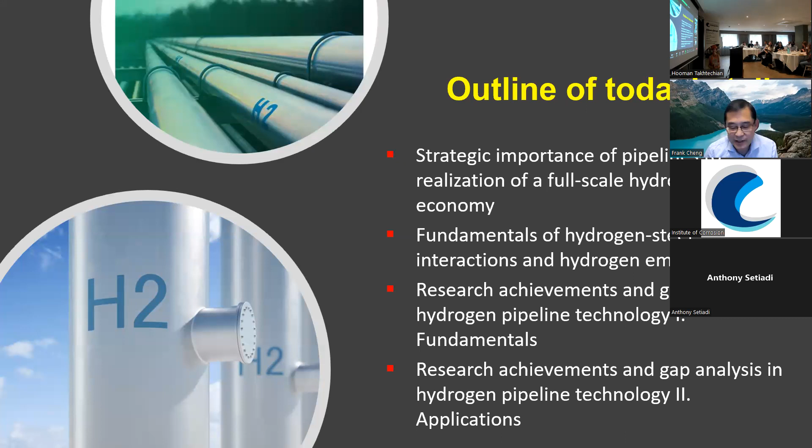According to many, the world is heading for hydrogen. You can find lots of documents reviewing the importance of hydrogen in energy transition and its application in different sectors by 2050. At the same time, different countries and government bodies have issued hydrogen strategy documents. Here are two examples published by the US and Canadian governments. In Canada, the provinces of British Columbia, Alberta, and Saskatchewan have also published hydrogen roadmaps and studies, along with government policies to realize and develop the hydrogen economy in the near future.

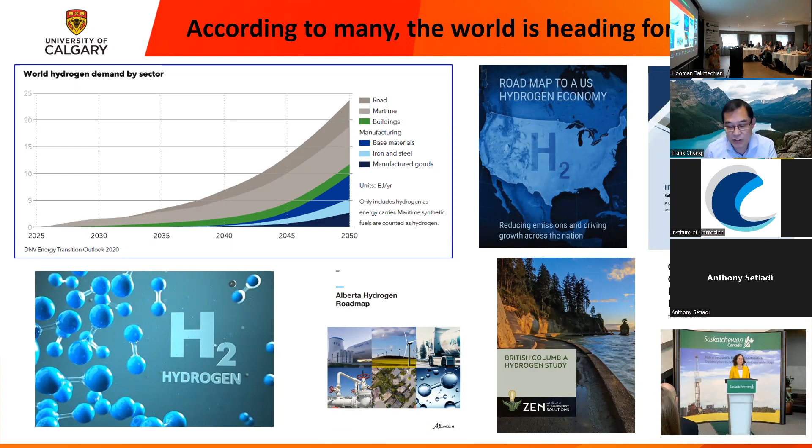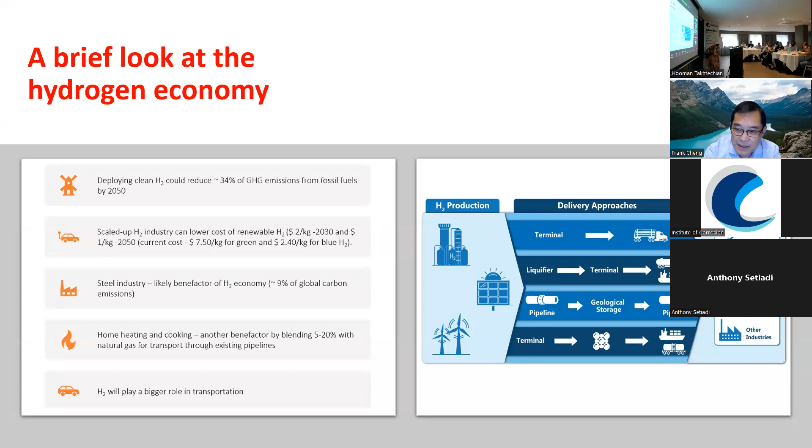The hydrogen economy actually includes 3 interrelated sections. You can see from this slide it includes hydrogen production, hydrogen delivery, and hydrogen use. So efficient, economic, and safe hydrogen transport is pretty important for realization of the hydrogen economy because it's one of the important components of the hydrogen value chain.

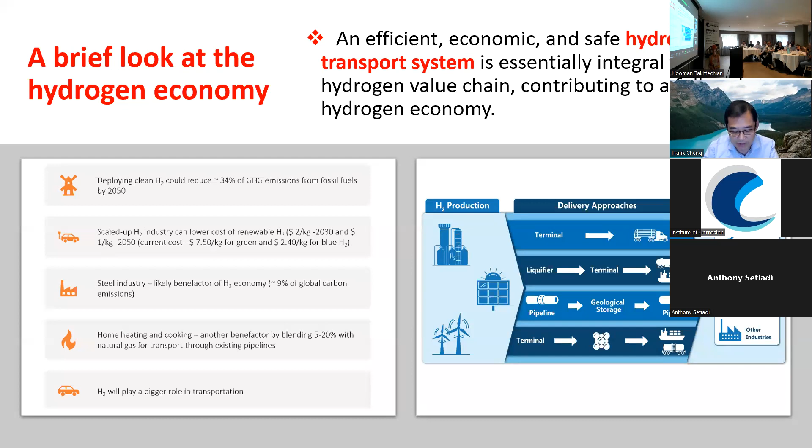Currently we have many different methods to transport hydrogen, either through tank trucks, tube trailers, or pipelines. A very quick comparison from this table shows that when pipelines are compared with tank trucks and tube trailers, pipelines have many advantages in terms of transportation capacity, cost, and efficiency, especially for long distance transmission of hydrogen. That's the reason the US Department of Energy issued a statement: transporting hydrogen through existing pipelines provides a low cost option for delivering large volumes of hydrogen.

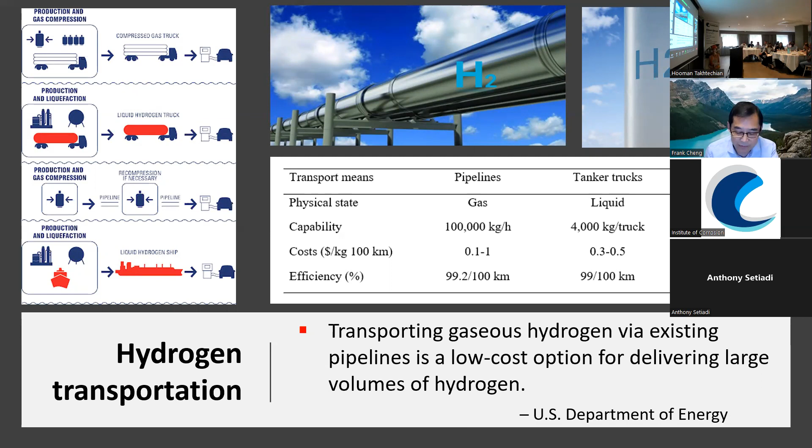There are 2 types of pipelines we usually talk about. One is dedicated pipelines, referring to pure hydrogen transport pipelines, where hydrogen is mainly used in the transport and power sectors. At the same time, another important topic is blending hydrogen with natural gas through existing natural gas pipelines, which is a blended form of hydrogen transport. This blended hydrogen is mostly used in manufacturing and building sectors.

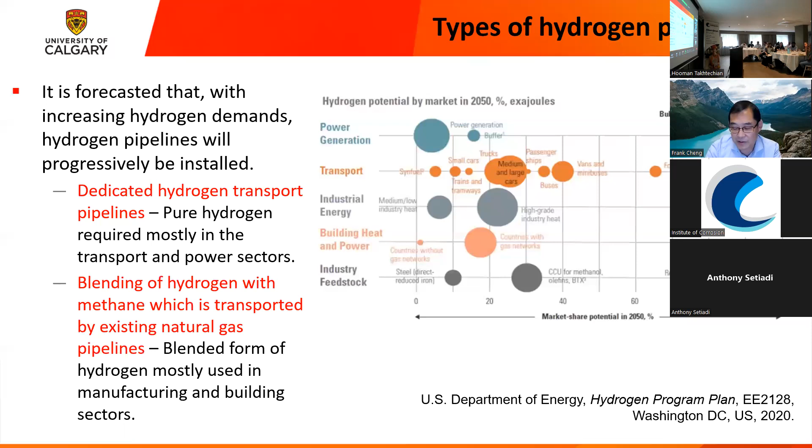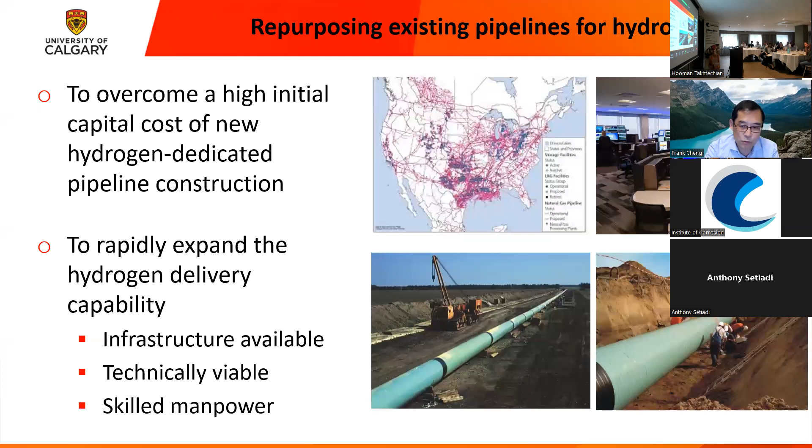We use the existing pipeline for hydrogen service, and there are lots of benefits. Firstly, it can overcome the high initial capital cost of new pipeline construction. At the same time, we have very extensive natural gas pipeline infrastructure. From the North American pipeline network, you can see the gas pipeline network is very extensive, distributed across Canada and the US. We have operated and managed natural gas pipelines over many, many years - we have the experience, the expertise, and the skilled manpower. That makes us, if we overcome certain technical issues, able to use natural gas pipelines to realize the hydrogen economy at an increased speed.

Of course, when we convert existing pipelines to transport hydrogen, we do realize there are technical challenges in at least 4 different aspects. First is pipe material - whether old or corroded pipeline is safe enough to transport high pressure hydrogen. Second is operation, related to hydrogen natural gas blending and some operation issues. Third is integrity, for example leak detection and how to perform inline inspection for hydrogen pipelines. Finally is safety for the users.

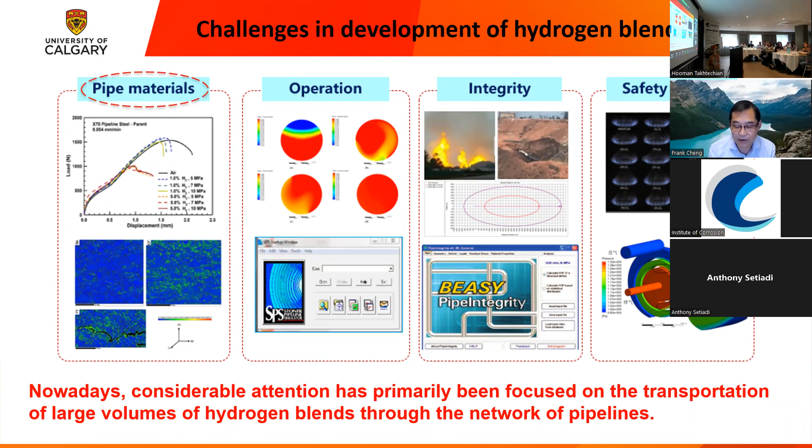If you have a chance to attend relevant events, I believe considerable attention has been focused on the transportation of large volumes of hydrogen through networks of pipelines. That's also consistent with today's topic, and I will focus on the first area of challenge, which is pipe materials.

That's just a quick review of some background. The next part is the fundamentals of hydrogen embrittlement. So what is hydrogen embrittlement? It's a general term that refers to the degradation of metals owing to hydrogen-steel or hydrogen-metal interactions.

So degradation, the key word here, can actually mean many different forms or modes, and I will talk about that a little bit later. But firstly, I want to emphasize a very important concept: hydrogen embrittlement.

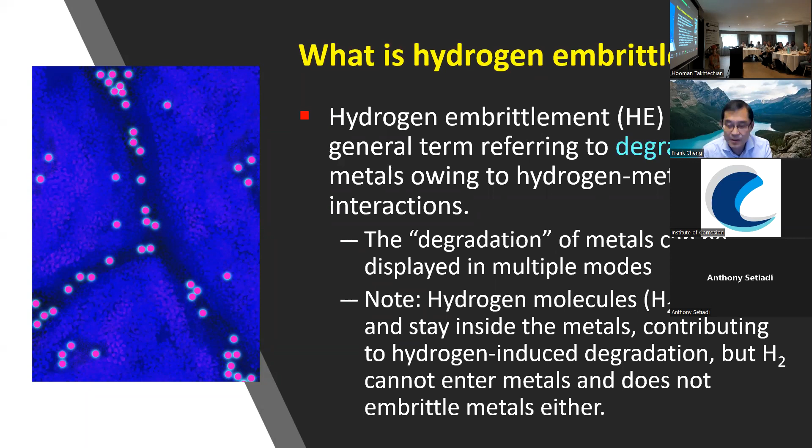So what is the hydrogen here? Hydrogen here means the hydrogen atom, H. The reason is pretty clear: hydrogen molecules, H2, cannot enter the metal or steel directly. However, the H hydrogen atom can stay inside the metal. So when we talk about hydrogen embrittlement, we always refer to hydrogen atoms entering the metal from the environment. That's why we emphasize that it's the hydrogen atom that can make the metal brittle.

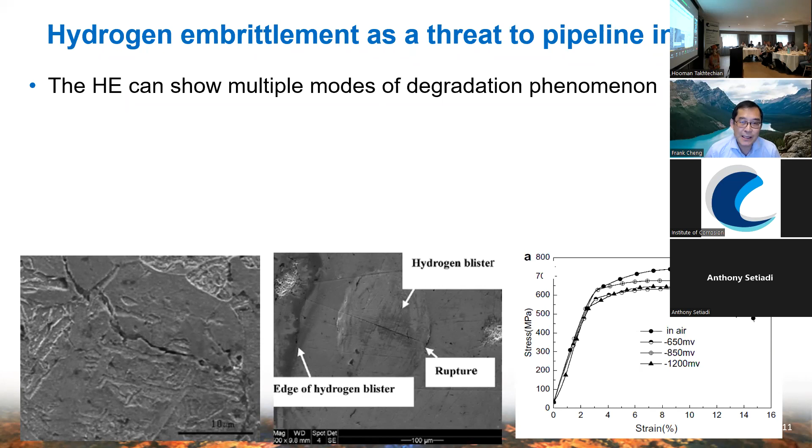Okay, so when hydrogen embrittlement happens, it can show multiple modes of degradation. The most important degradation of metals is hydrogen-induced cracking. When hydrogen goes into the steel, cracks can be formed and initiated by many different mechanisms, which I will talk about a little bit later. This is the most dangerous mode of hydrogen embrittlement.

At the same time, hydrogen can degrade the mechanical properties of metals, such as loss in ductility and reduction in fracture toughness. So they will cause degradation of mechanical infrastructure integrity and can cause the failure of pipelines.

Okay, for hydrogen embrittlement to happen, it usually includes 6 steps. This is the entire process for hydrogen embrittlement to happen.

Firstly, the hydrogen atom must be generated in the environment. After the hydrogen atom is generated, it will adsorb on the external surface of the metal — we call it adsorption. Then the next step is the adsorbed hydrogen from the outside goes into the inside of the metal, from adsorption becoming absorption. So we usually call it ADS hydrogen and ABS hydrogen.

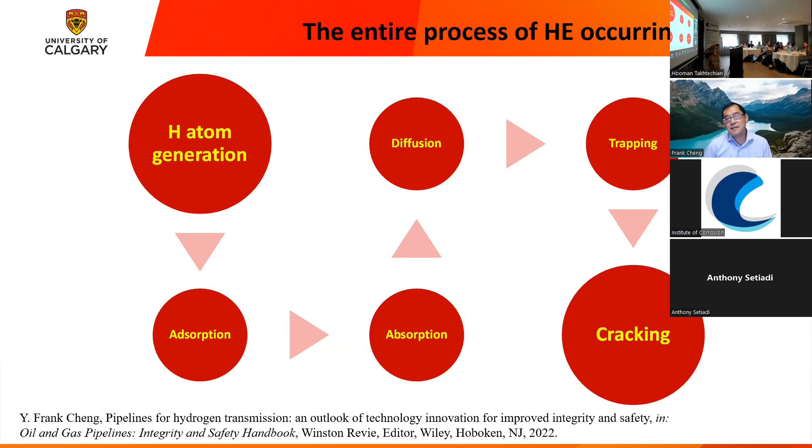If the trapped hydrogen reaches a certain concentration, combined with a certain metallurgical microstructure and mechanical stress, then cracks can be initiated — that's called hydrogen-induced cracking. So basically there are 6 steps included in the entire process.

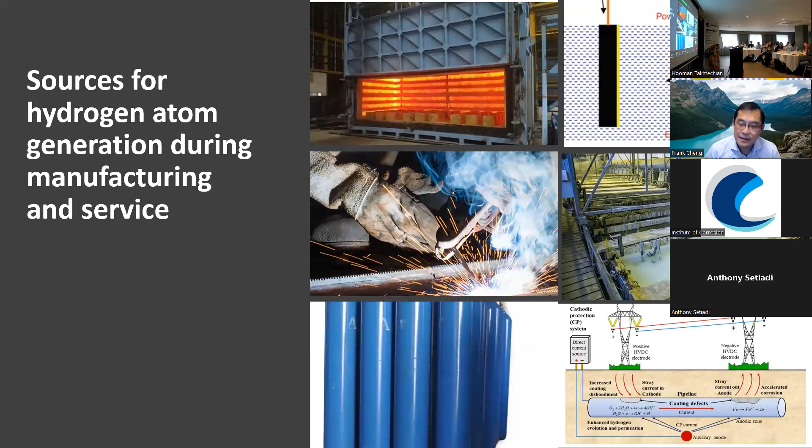Okay, so first let's look at the first step. Hydrogen can be generated in many different environments. You can see from these slides it can be produced in heat treatment, electroplating, welding, surface treatment, high pressure hydrogen gas, and what we call corrosion reaction. Anyhow, no matter the source, please remember we're talking about the hydrogen atom, H.

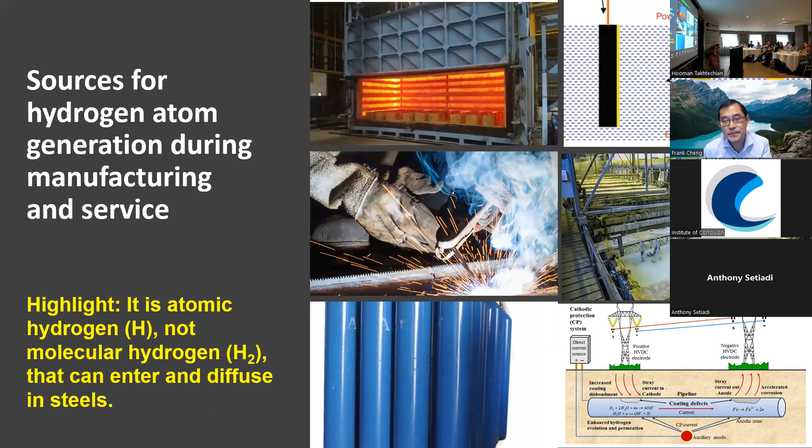For pipelines, hydrogen can be produced from outside the pipeline or inside the pipeline. If we talk about hydrogen produced from outside, since most pipelines are buried structures, this mainly refers to the soil side. For example, corrosion can happen if the coating fails or cathodic protection is not effective.

You can see from these slides that the hydrogen atom can be produced by the hydrogen evolution reaction, an electrochemical reduction of hydrogen ions. The hydrogen atom, HADS, can either combine into hydrogen molecule H2. If the H2 is produced by either chemical recombination or electrochemical recombination, then we don't worry about hydrogen embrittlement, because the hydrogen molecule cannot go into the steel.

However, there is a certain percentage of the HADS that can go into the pipeline steel and become HABS. So this is the main mechanism: hydrogen generation and hydrogen permeation from the corrosion reaction.

And of course, if cathodic protection is not properly controlled — what we usually call cathodic overprotection, or over CP — it can also induce hydrogen atoms. So that's from the soil side.

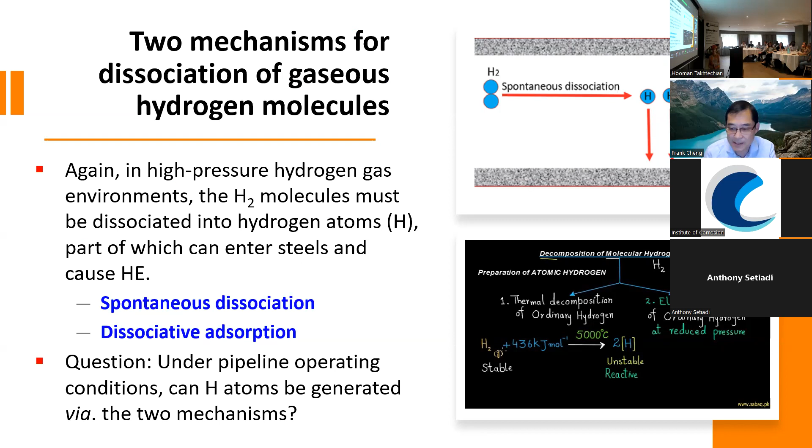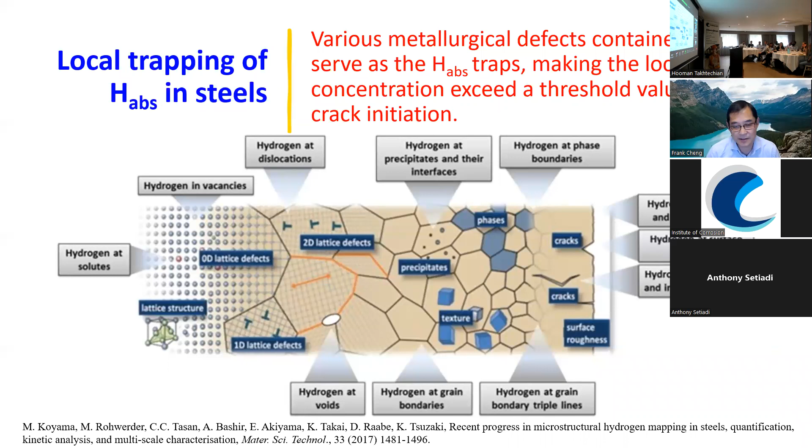If the local hydrogen concentration reaches a certain threshold value, combined with stress and certain steel metallurgy conditions, cracks can be initiated. So why does hydrogen reaching a certain concentration make the crack initiate? If you review the literature, you can find lots of different mechanisms, but two main mechanisms are very popular in hydrogen embrittlement.

We call the first one HEDE, hydrogen enhanced decohesion mechanism. Based on this mechanism, hydrogen atoms can weaken and break the bonding between the Fe and Fe bond.

The second one we call the hydrogen enhanced local plasticity mechanism. According to this mechanism, hydrogen atoms can combine with internal dislocations and decrease the movement energy requirement for dislocation movement. In this way, hydrogen can increase the mobility of dislocation.

So which mechanism applies for a certain system? My answer is it depends. We need to think about the mechanical property of the metal and the steel, and what's the steel metallurgy of the steel. At the same time, it also depends on hydrogen atom concentration.

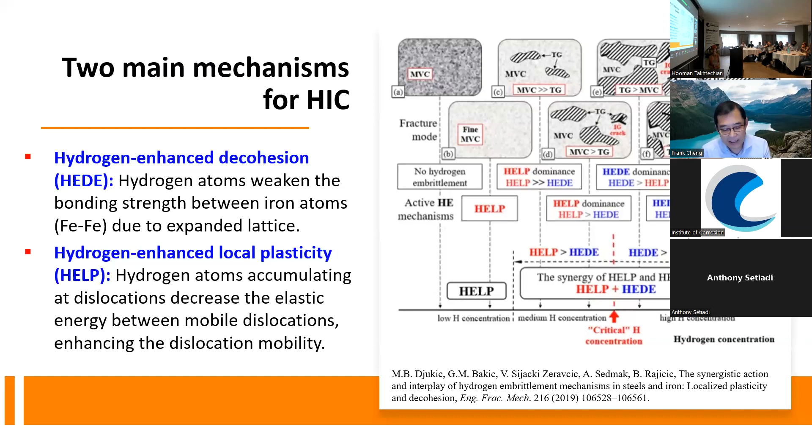Because of limited time, I won't go into much detailed discussion about the mechanism. But basically, to quickly summarize the fundamentals of hydrogen embrittlement in one sentence: for hydrogen embrittlement to happen, it depends on three interrelated conditions - the steel metallurgy, the mechanical stress, and the local hydrogen atom concentration.

When we talk about the hydrogen embrittlement of pipelines, let's go to the current research progress and some of the gaps and analysis of gaps. The first thing: how is hydrogen atom generated in high pressure hydrogen gas environment? As I introduced in the fundamental section, there are two mechanisms.

The first one is spontaneous dissociation of hydrogen molecules. This reaction is simple. On the top left side, based on this mechanism, H2 hydrogen gas decomposes into H, that's a hydrogen atom. When we calculate the free energy change of this reaction, according to different hydrogen pipeline operating conditions, such as temperature and pressure...

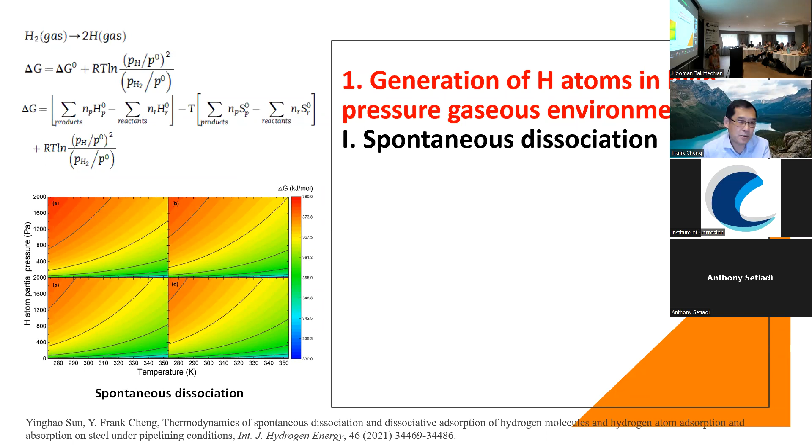You can see across all the conditions, the free energy change of this reaction is positive. We know if the free energy change is positive, that means this reaction is thermodynamically not possible. Based on the thermodynamic analysis, we can have an important conclusion: under pipeline operating conditions, the spontaneous dissociation of hydrogen molecule is not possible. That's why we don't need to worry about hydrogen atom generation by this mechanism, because the thermodynamic calculation tells us the answer is no.

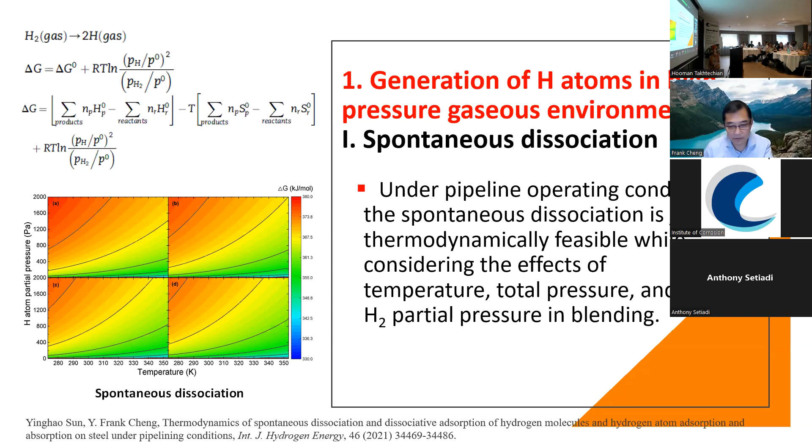How about another mechanism? That's dissociative adsorption. On the left top side, you can see this mechanism, and we can write the reaction: hydrogen gas, H2, adsorbed on the surface of the steel - using crystal plane 100 as an example - this reaction can generate the hydrogen atom H.

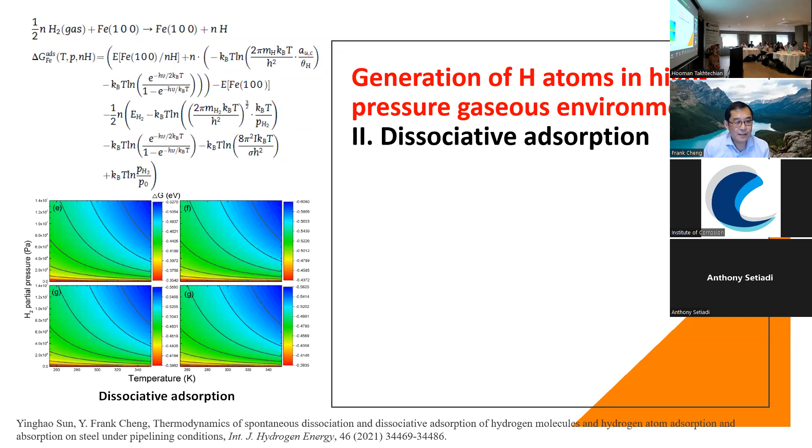We also performed the thermodynamic calculation for this. You can see the results here: across different temperature and operating pressure, the free energy change is actually all negative. This calculation tells us that when we use the pipeline to transport hydrogen gas, hydrogen atoms can potentially be generated based on this mechanism, because the thermodynamic calculation tells us yes. That's why potentially the hydrogen atom can be generated and go into pipeline steel to cause hydrogen embrittlement if we use a pipeline to transport hydrogen.

Okay, so I'll give the main results and the thermodynamic model here, and just share with you. We need to care about this problem. That's the first important thing involved in the hydrogen atom generation.

The second question: when we use the existing natural gas pipeline to transport hydrogen, how will methane, CH4, the main component of natural gas, interact with the hydrogen, H2? Consequently, this will influence the adsorption and dissociation reaction. That's related to the influence of the two major gas components when we use a pipeline to transport the blended form.

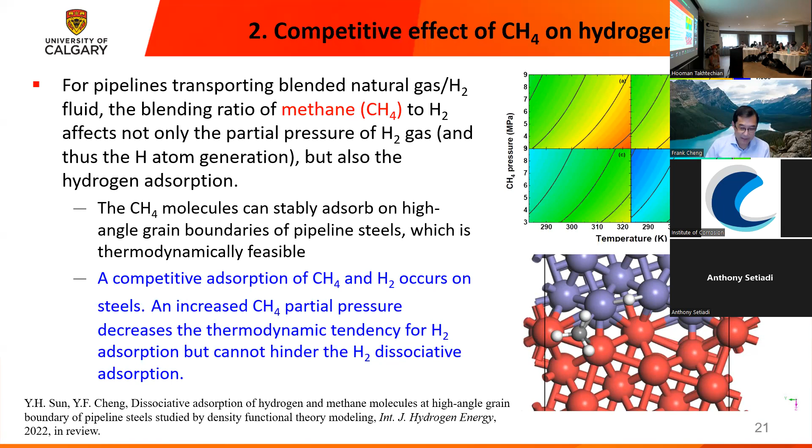Okay, the third important question is related to the permeation of hydrogen atoms from the outside of the steel into the inside of the steel. I'll just quickly share with you the results.

I don't want to touch too much on steel metallurgy because I think the audience has a varied background. But basically, when a hydrogen atom goes into the steel, if it can distribute uniformly everywhere in the crystal structure, we don't worry about hydrogen embrittlement, because uniform distribution keeps the local concentration of hydrogen at a low level. This means the steel has a certain tolerance to hydrogen atoms.

A single hydrogen atom won't cause a cracking problem. There is a certain tolerance to hydrogen atom accumulation, so uniform distribution of hydrogen is not a big trouble for the steel.

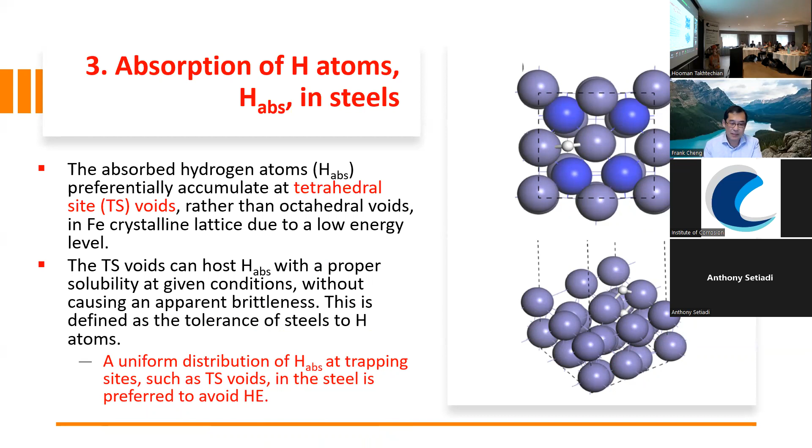As we introduced in the fundamental part, what we worry about is the local trapping of hydrogen, the local accumulation of hydrogen atoms reaching a certain concentration. So how do we visualize and measure local hydrogen accumulation? It's not easy, because hydrogen is very small and direct observation is a very challenging task. Fortunately, modern surface analysis techniques enable us to achieve very small resolution.

For example, at the University of Calgary, in my lab, I have equipped advanced techniques, and I'll share with you the major results. If there is a micro dent in the steel, the hydrogen atom can actually accumulate in the dent area because of stress concentration.

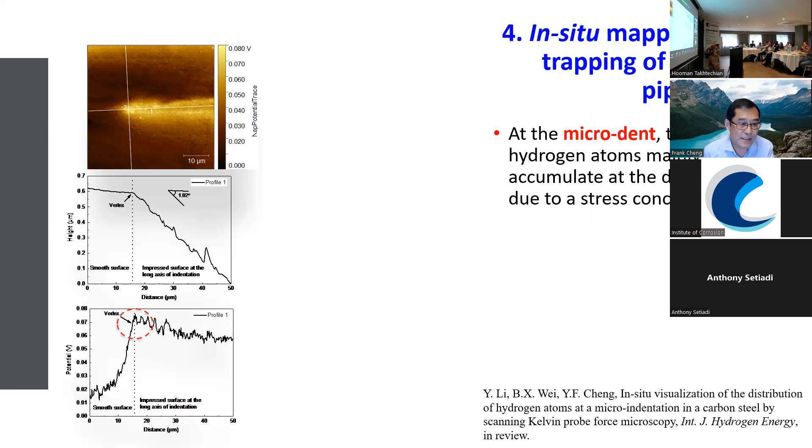If hydrogen goes into the steel, where will it stay? When we use a steel pipeline to carry gas, such as natural gas, our knowledge tells us that natural gas usually experiences pressure fluctuation.

This will influence stress corrosion cracking very much. That's why some people regard hydrogen stress corrosion cracking, or pipeline stress corrosion cracking, as a special form of corrosion fatigue, because pressure fluctuation induces cyclical stress that causes cracking and propagation.

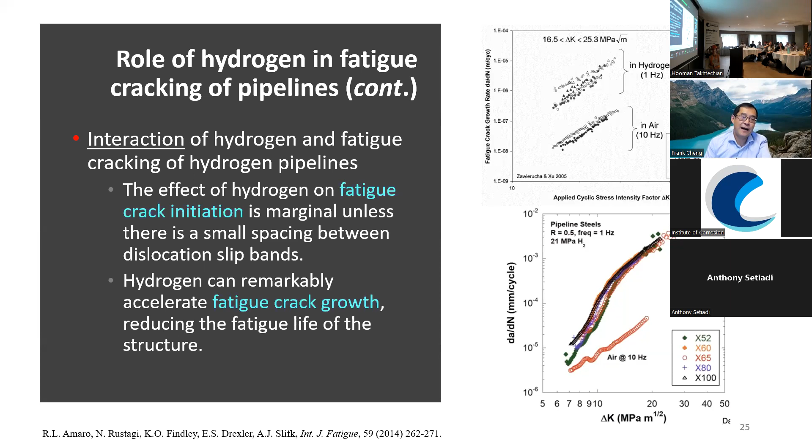At the same time, if hydrogen gets into the steel, it can speed up fatigue crack growth. That's why under hydrogen and fatigue, they can make the pipeline fail quickly, because hydrogen can speed up the fatigue cracking process.

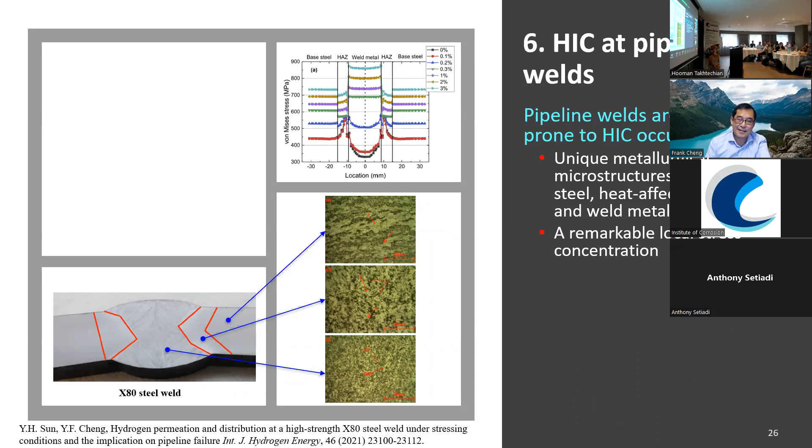When we talk about hydrogen embrittlement or hydrogen-induced cracking, we realize the pipeline is a welded infrastructure. The welding area is always sensitive to hydrogen-induced cracking because it has a unique metallurgical microstructure and local stress concentration, as shown in these simulated results.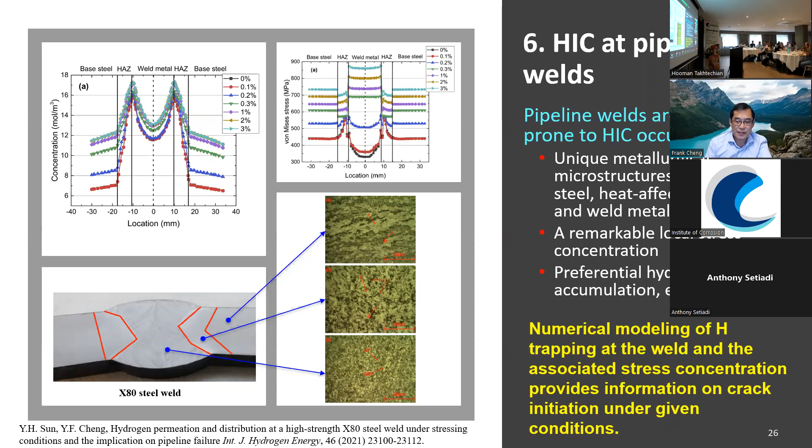The special steel metallurgy and local accumulation of hydrogen usually cause cracks to start preferentially in the welding area. That's why developing a numerical model to simulate hydrogen trapping in the welding area is a very interesting research topic, and the industry is also interested in learning from this topic.

In terms of hydrogen prevention from the metallurgical design, there are many proposals to modify the pipeline steel metallurgical process. A common method is to process the non-metallic inclusions, because current research found that if the inclusion becomes sub-micron scale and uniformly distributed in the steel, it can decrease local trapping of hydrogen atoms. Consequently, it brings the hydrogen concentration inside the steel to a very low level, so hydrogen embrittlement can be reduced.

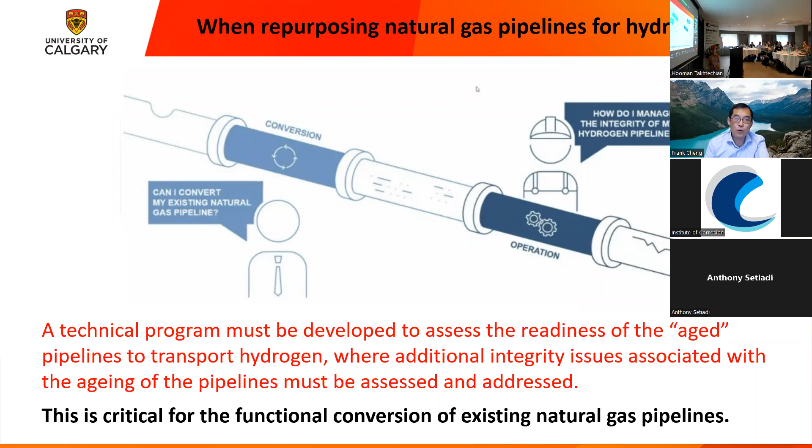When we use aged pipelines to transport hydrogen, we also have additional challenges to overcome before converting the pipeline to hydrogen service. The first thing to realize is that after long-term service, natural gas pipelines usually contain dents, corrosion defects, and micro cracks.

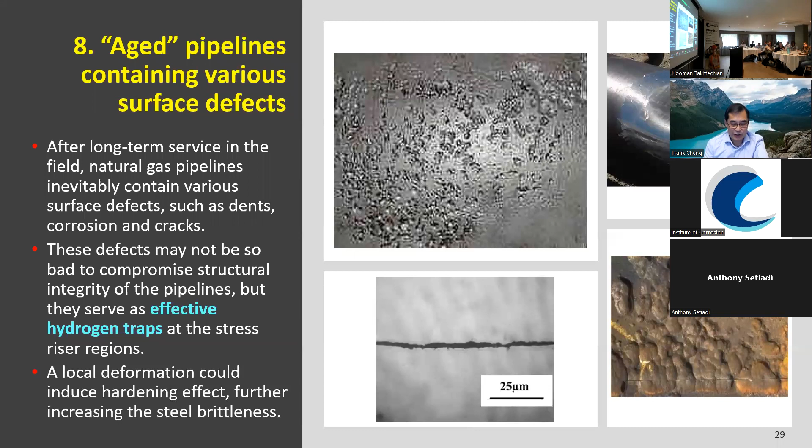These defects tend to be effective hydrogen traps because of stress concentration. That's why we have to develop a technical assessment program to evaluate how effectively these defects trap hydrogen atoms. For example, if the pipeline contains mechanical dents, our simulation directly tells us that hydrogen atoms tend to accumulate at the dents.

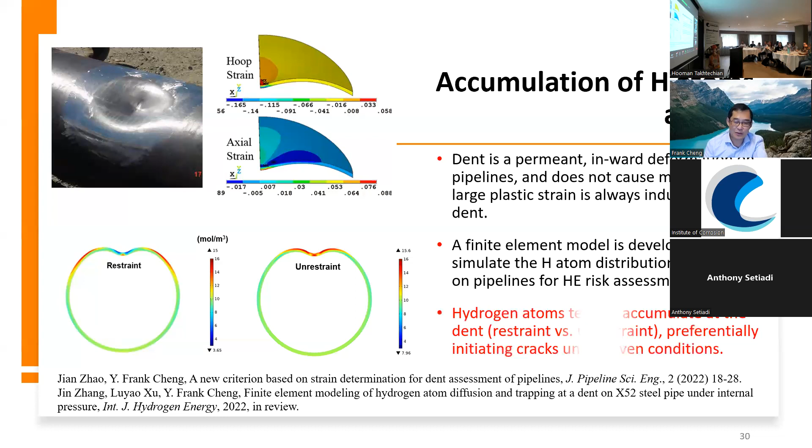This makes the local hydrogen concentration reach a high level, and the same results apply for corrosion defects. Whether the corrosion is an internal or external defect, hydrogen atoms tend to accumulate in the corrosion area, making the local hydrogen concentration reach a certain value, and consequently hydrogen-induced cracking tends to happen at corrosion defects.

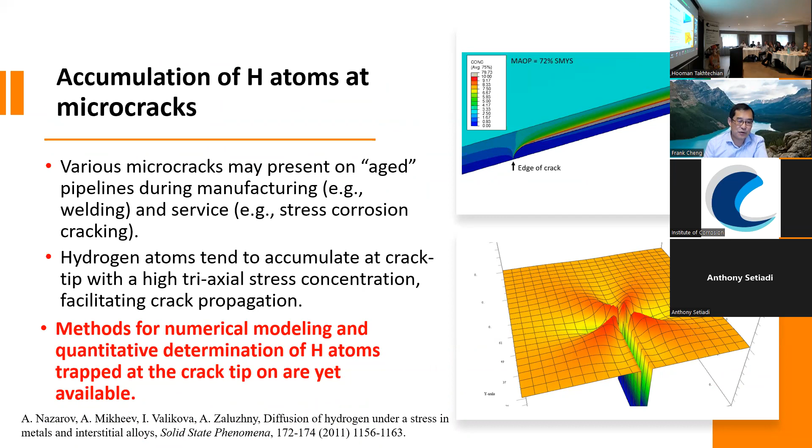If the aged pipeline contains micro cracks, simulation results also show that micro cracks, because of local stress concentration, can also trap hydrogen and make the local concentration reach a certain value. So that covers the aged pipeline's surface defects.

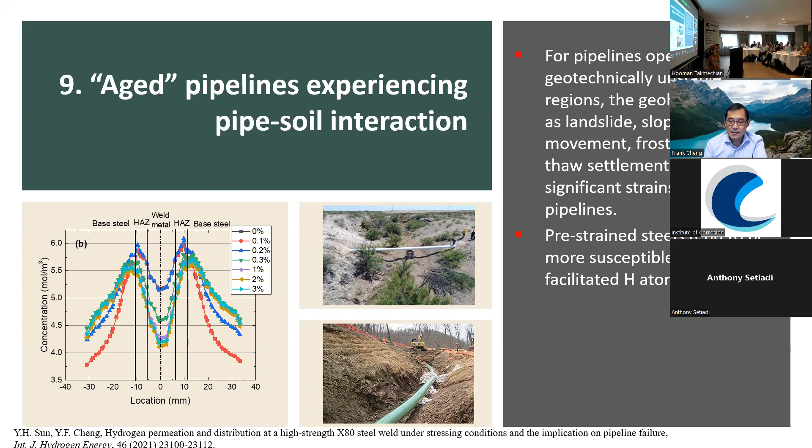At the same time, aged pipelines usually experience pipe-soil interaction, especially in geotechnically unstable regions such as mountain areas. Research has found that if the soil induces a certain strain on the pipeline steel, the pre-strained steel is sensitive to local hydrogen trapping and consequently causes hydrogen-induced cracking. That's why simulating the hydrogen pipe-soil interaction to evaluate how soil strain influences hydrogen accumulation is a very important technical evaluation program.

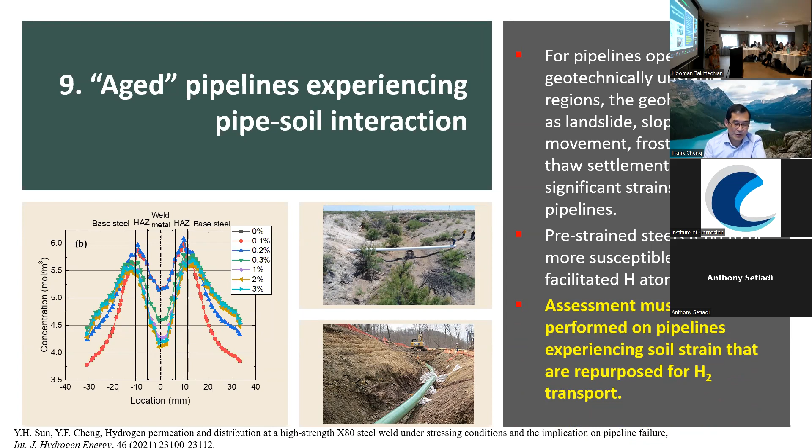Finally, in addition to the H2 molecule, the carried gas probably also includes oxygen, water vapor, and some other gas components. How to assess the influence of these impurity gases on hydrogen embrittlement is also an important technical evaluation topic.

To conclude my talk, I think it's time. I just want to say that hydrogen pipelines are currently a very hot topic, whether in European countries, Asian countries, or North America.

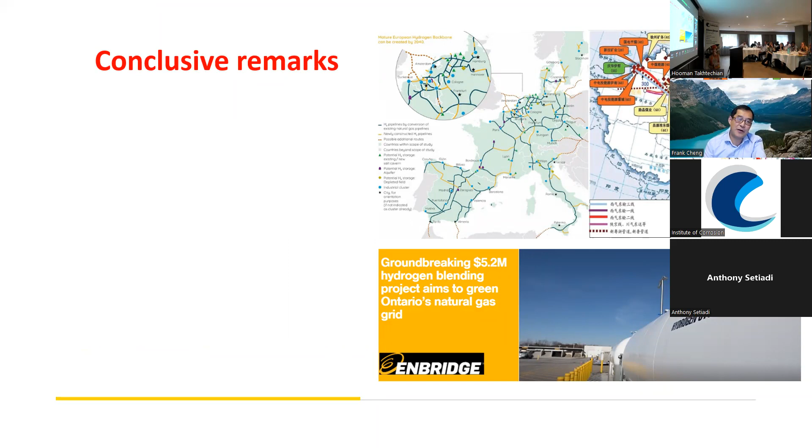And the hydrogen pipeline attracts wide attention. But basically, I want to conclude with three important remarks.

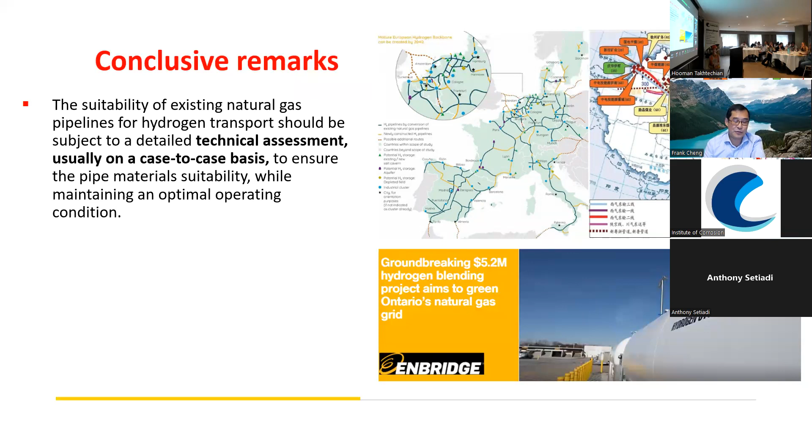Before we convert the existing gas pipeline for hydrogen transport, we need to develop a detailed technical assessment program, in order for the pipeline to transport hydrogen safely and efficiently.

At the same time, we have to develop standards to guide the industry in the conversion. Finally, we have to realize there are extensive scientific and technical gaps to be filled in this important topic.

Thanks Oli, thanks Shravan. Welcome guys. Today I'm going to talk on the challenges in assessing the corrosion resistance of pipeline steels against CO2. So here is the outline of my talk.

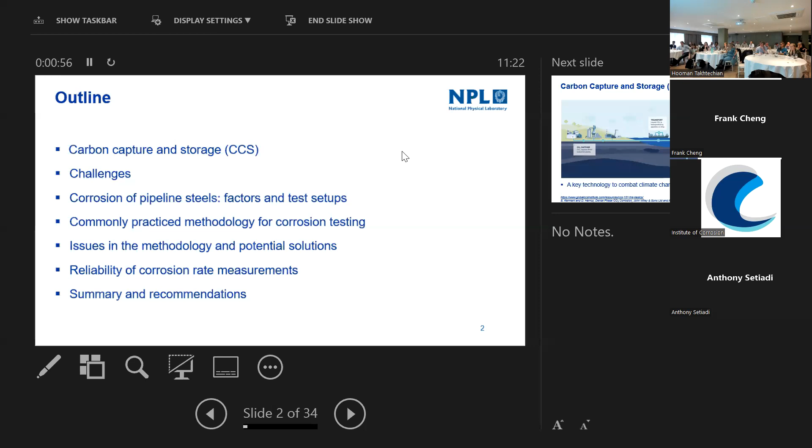So what I'll do is introduce carbon capture and storage, and how CO2 is transported by pipelines, and what are the conditions, and what's the current status and the challenges we have in corrosion measurements. Before going into the test methodology, I'll introduce the factors that influence corrosion of pipeline steels and the different setups used for assessing them, what is the common methodology normally employed, and whether there are any issues in the methodologies and potential solutions. I'll comment on the reliability of corrosion measurements, and finally summarize the topic and provide some recommendations.

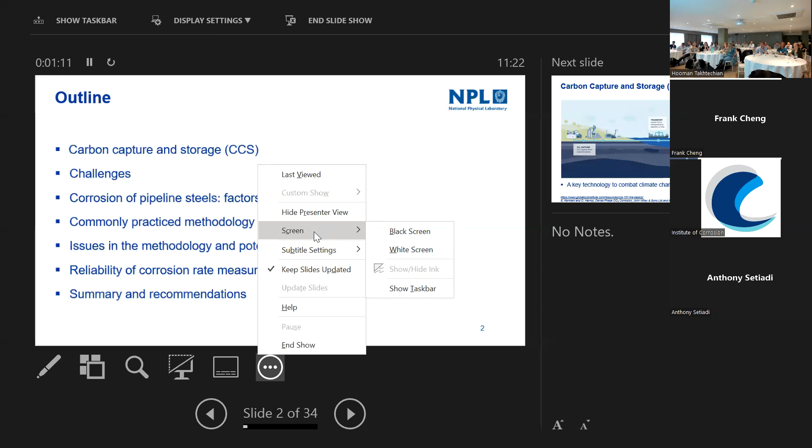So without much delay, let's enter into the CCS world - corrosion. Carbon capture and storage is a process of capturing CO2 from industries and transporting it through pipelines or ships, and it can be stored underground. Based on this, CCS has significant potential to decarbonize fossil fuel power plants and various industrial sectors while limiting CO2 emissions into the atmosphere.

And as we learned from Bell's lecture, generating 1 ton of steel releases approximately 1.8 tons of CO2, which is equivalent to 8% of global CO2 emissions. If we can capture that CO2, it's really awesome. So CCS is a key technology to achieve net zero targets and combat climate change.

So how is CO2 transported? It can be transported via pipeline, ships, and roadways, but pipeline transport of CO2 is more economical and safer. Here is the phase diagram showing the different phases of CO2, and it reveals that pipeline transport of CO2 is carried in the dense phase. The dense phase is normally considered above this critical temperature, which is the liquid and supercritical phase. In the open literature, it's not very clear exactly what pressure and temperatures CO2 is transported at, but one indication is that it has to be in the liquid or supercritical phase, above this critical pressure, avoiding the gas phase.

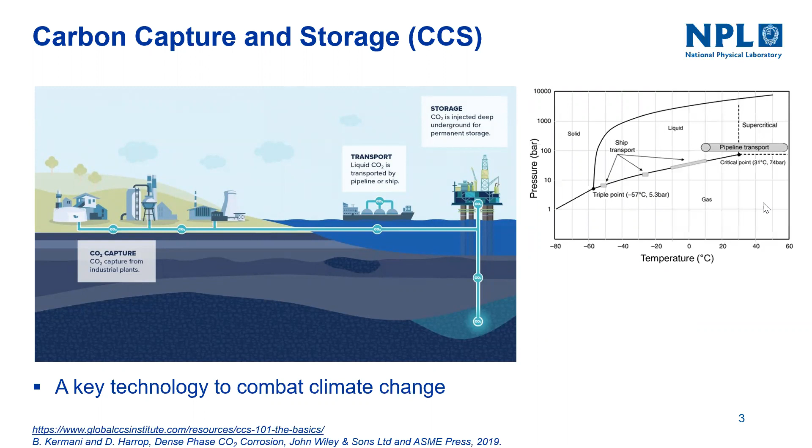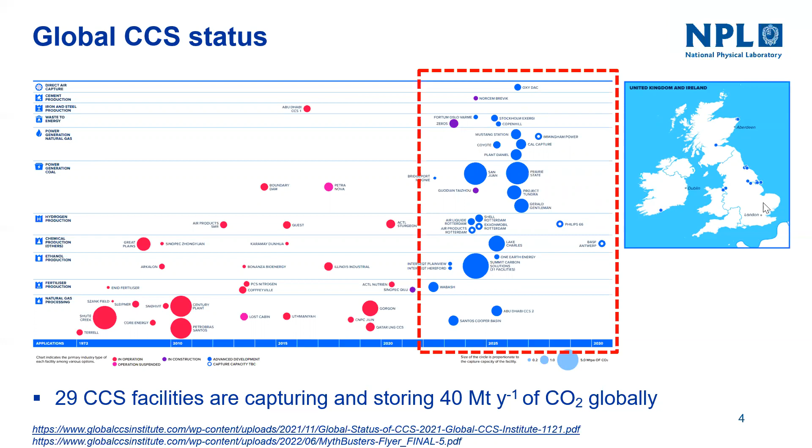Based on experience, CCS has been in practice since 1972, primarily in the USA. Low carbon steels of API grade are used as they're economical and reliable, and most pipelines are for enhanced oil recovery. We have very little information, but based on this, there were 39 pipeline accidents from 1986 to 2008, and corrosion accounts for 45% of these.

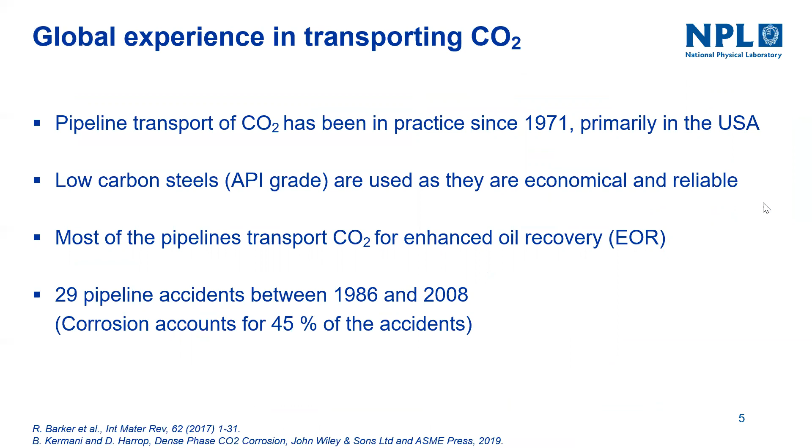So let's see why corrosion occurs in CO2 pipelines. CO2 contains several impurities such as water and oxygen, and there could be many more depending on where the CO2 is captured from. Normally CO2 is non-corrosive as long as the water is in the dissolved state. But once the water condenses, CO2 dissolves in the liquid water, and other gases also dissolve.

So for example, here is a case of formation of carbonic acid and nitric acid. The corrosion occurs by dissolution of iron supported by cathodic hydrogen reaction.

So what could be the reason for water to condense? One thing is the variation in temperature and pressure. The solubility of H2O can decrease, and also have the impurity content. If the impurities are more, the solubility of H2O in the CO2 decreases.

For example, if you have more pipeline networks coming from different streams, and though H2O is in the soluble state, but CO2 coming from another pipeline network can decrease the solubility of H2O, and this can cause water condensation, subsequently corrosion.

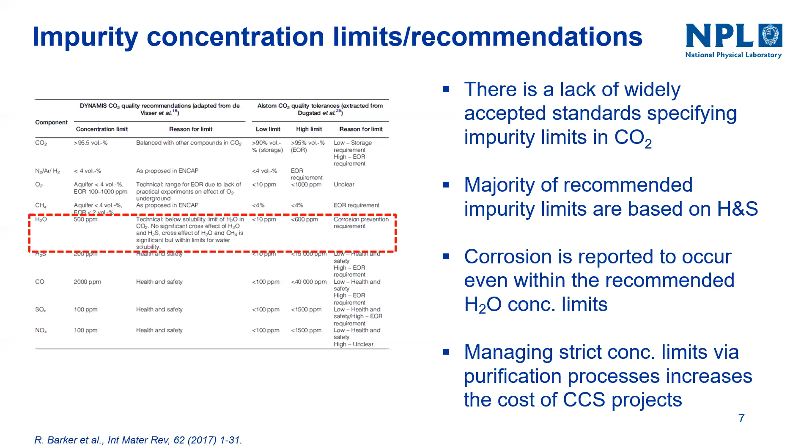So what are the challenges we have? The safe, reliable, and economic transport of CO2, that's one thing. Currently we have limited global experience in transporting anthropogenic CO2, as we are going to capture more CO2 from different sectors. The failure of pipeline due to corrosion can lead to fatalities or injuries.

Actually, CO2 is non-toxic and non-flammable, but the issue is it's denser than air and can settle in low regions, and it doesn't have any smell and we can't see it. So we have little warning before people can breathe CO2. It's very dangerous. And second, the standard test methodology that tests the corrosion of pipeline steel in dense phase CO2 does not exist.

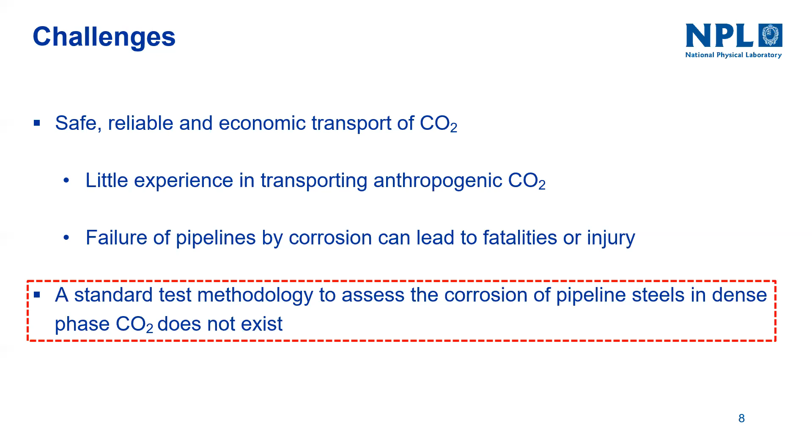So this is our major focus here. For the successful deployment of CCS technology, we need confidence in the methodology of assessing the corrosion of pipeline steel in dense phase CO2.

Before going further, I'll introduce how corrosion rates are measured. One is time average corrosion rates, where specimens are exposed to dense phase CO2 and we measure the mass loss. Second is measuring localized corrosion rates.

What will be the typical values we're talking about here? For pipeline steel of X65 grade, just containing water with no impurities, the measurement value is typically less than 0.4 mm per year, and the localized corrosion rates are higher by more than 1 order of magnitude. These are not really acceptable, and with more impurities, the values are significantly higher.

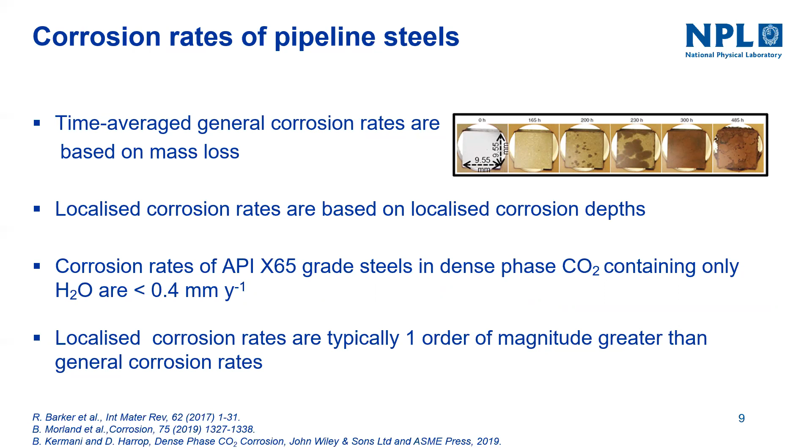Before going into it, we need to know the factors really influencing pipeline corrosion. One is dense phase CO2 - the impurities it contains, the pressure, temperature, and flow rates. From the pipeline side, there's the grade of material, the weld sections, internal surface roughness, and stress. I'll discuss these in the coming slides.

One key factor is the concentration of impurities during the whole duration of testing, because in the CO2 stream there is continuous replenishment of impurities due to continuous flow. But normally in testing there could be a depletion of impurities, so we need to control the concentrations, which can be done by periodic or continuous analysis of impurity concentration during testing.

One approach can be gas analysis, but the issue is it's only possible at atmospheric pressure. Here you can see the change in water solubility in CO2 with variation in pressure - from gas CO2 to liquid phase, the solubility of H2O varies significantly. So if you have to measure the concentration of impurities, it's significantly different, and there could be errors coming up with the analysis.

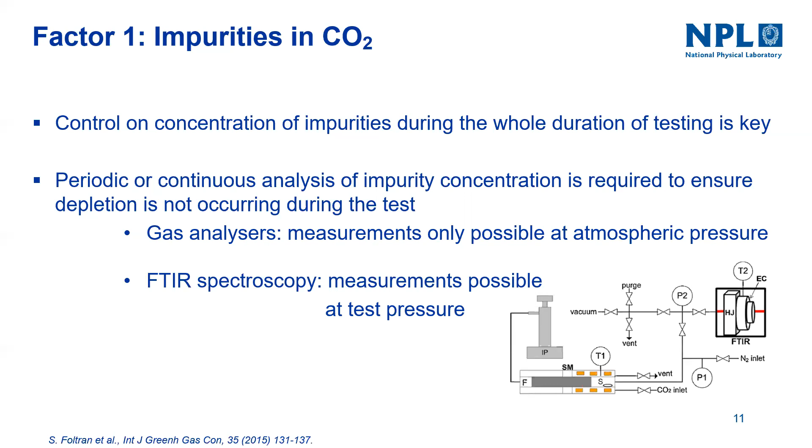Another factor is that during testing we need close control of temperature and pressure. If corrosion testing is happening at 25 degrees centigrade and the temperature suddenly falls to 15 degrees centigrade, there's a decrease in the solubility of water, which is like 500 ppm. So if you're very close to the solubility limit, a fluctuation during testing can cause accidental condensation of water where corrosion can take place.

The second thing is pressure. Normally with decreasing temperature, CO2 solubility increases in water, similar to gaseous impurities. So the higher the solubility of CO2 or gaseous impurities in water, the corrosivity of the condensed water increases.

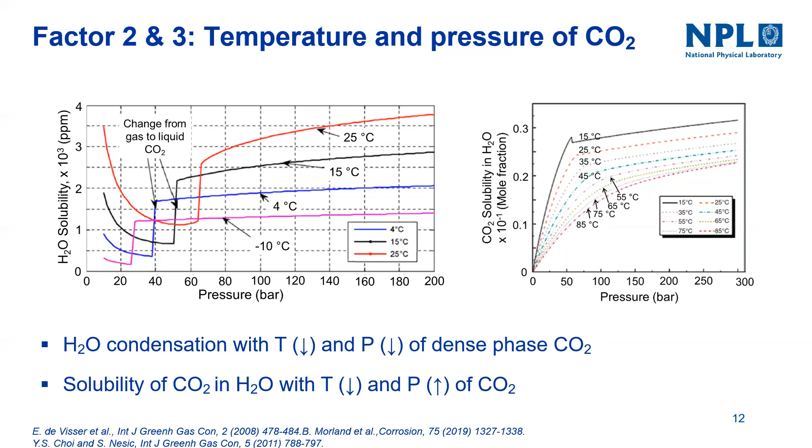Temperature and pressure can also play a role in corrosion rates. One factor is the durability of corrosion products. Normally with increasing temperature, corrosion products are more compact, but it depends on what corrosion products are forming. The influence of pressure on this protective ability is currently unknown.

Considering the importance of temperature and pressure, we need continuous monitoring and control of both, and also independent control of temperature of test specimens. This has also not been established.

This is important because the pipeline surface has a temperature influence from the surrounding atmosphere, and there could be a temperature change close to the surface that has an influence. So independent control of temperature is essential, but none of the experimental designs have managed to design that kind of setup.

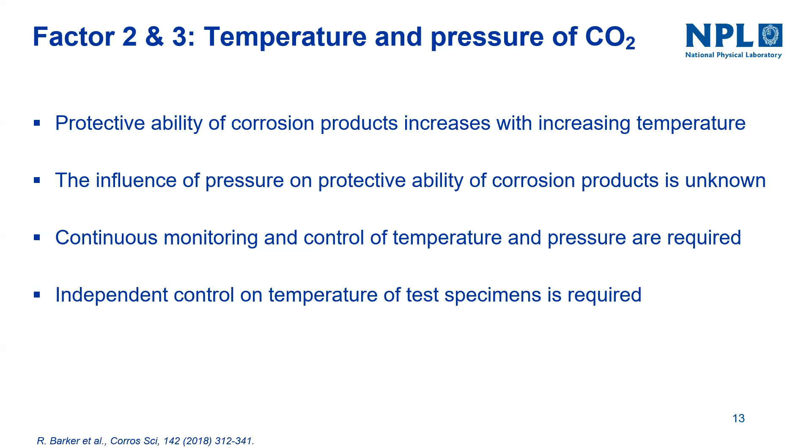The third factor is flow rate. Let's look at the possible influences of flow rate on corrosion. There are three possible things to consider, one being wall shear stress.

So what happens with wall shear stress is that when there is a flow of CO2, it can generate shear stress, and the corrosion products can be disrupted, creating a region where the corrosive solution can reach the surface beneath and cause corrosion of the pipeline steels.

Typical flow rates in the industry aren't clearly revealed, but typically they're lower than 2.5 meters per second for CO2. It was found that the wall shear stress generated is just about 1 Pascal, while the adhesion strength of FeCO3 developed in different conditions is significantly higher, meaning this wall shear stress cannot disrupt the corrosion products.

In contrast, different studies have indicated disruption and spallation of corrosion products, meaning the wall shear stress generated could be sufficient to cause disruption and spallation, depending on the corrosion products, and can increase the corrosion rate.

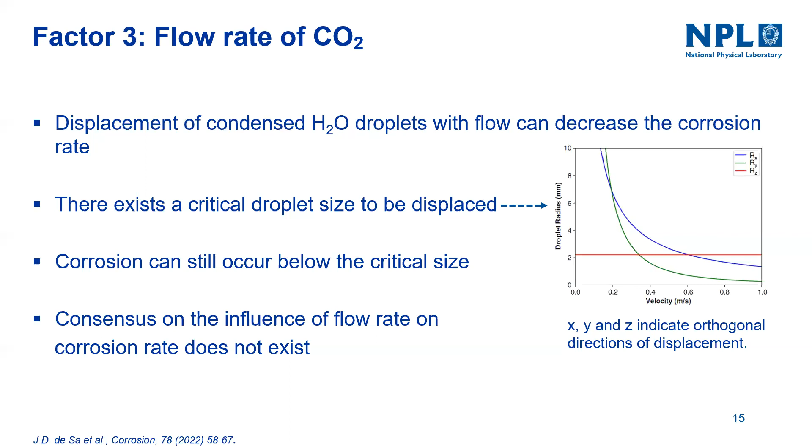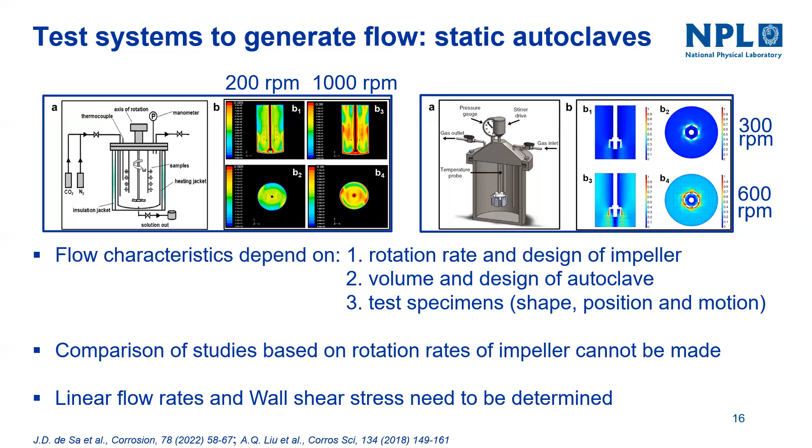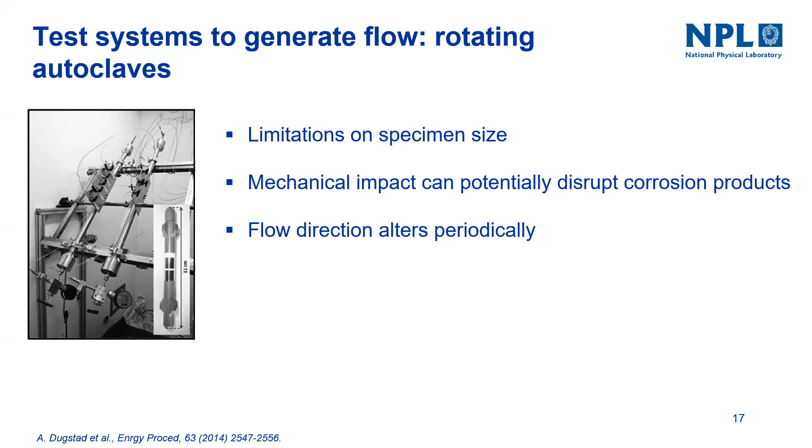So another type of system is the flow loop. This can be representative of service conditions depending on the test design. If you have a pipeline-like loop with the specimen in a pipeline shape, you can generate flow conditions similar to that. There are different types of flow loops in the literature, but actually more unique autoclave flow loops could be designed.

But right now it is very complex to generate the service conditions, such as flow generation over weld profiles, U-bends, or vertical or horizontal configurations. So right now it is premature to judge whether exact service conditions are required, considering there are several uncertainties in controlling the composition itself.

So the other factors that influence the corrosion rate are from the pipeline material - the pipeline grades, such as different API grade steels or corrosion resistant steels. What the studies reveal is there's no significant difference between different API grade steels like 65, 75, or 85. And even corrosion resistant alloys, such as stainless steels, experience similar corrosion to API grade steels.

And the key is controlling the impurity concentration. Even when the impurity concentration is significant, forming a very highly acidic corrosive medium, even highly corrosion resistant materials have to experience corrosion. So the key is to control the concentration of impurities.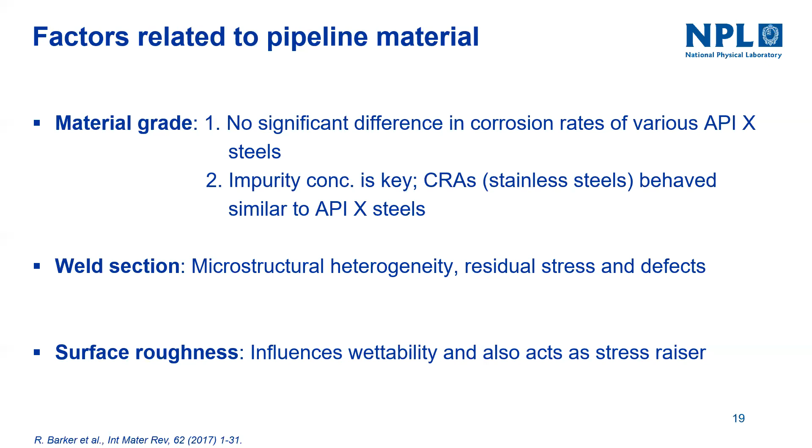Another factor is stress corrosion cracking. EIC occurs in gaseous CO2 containing H2O. Normally it is tested using a 4-point bend specimen. Everything is exposed, and you check if there are any cracks on the surface - there's a different setup here. But there are only about 5 or 6 studies studying EIC in dense phase CO2.

None of the studies reveal that these steels suffer environmental induced cracking.

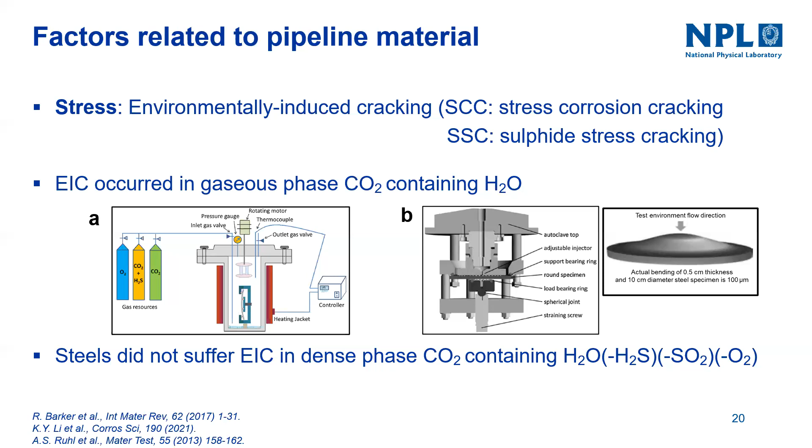So we have seen what are the factors that contribute to corrosion. Now let us see what is a commonly practiced methodology, and whether all the factors are taken into account.

So here is a procedure. This is an autoclave, normally used for studying these pipeline steels. Water is added in the liquid state, then the specimens are mounted, the autoclave is sealed, gaseous impurities are added, and it is pressurized to the desired test pressure and temperature. The test procedure is initiated once it is stabilized, and it normally takes 1 to 2 hours.

After the test procedure, we depressurize the autoclave, clean the specimens, and measure the mass loss. This is the majority methodology, followed by almost 90% of studies in the past decade.

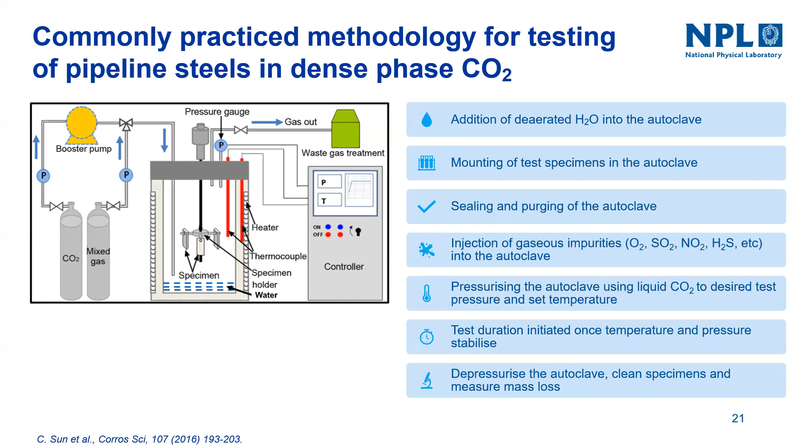Significantly, there are several issues. One is the control of the concentration of impurities, which is lacking because it is not measured during the testing, only prior to putting it into the autoclave. Also the deaeration of the autoclave - Morland et al. have identified other issues like accidental splashing of water on specimens, condensation of water during depressurization, and actual test duration. All these factors contribute to errors in corrosion rate measurements, which I'll go through.

One is H2O content. The amount of water added into the autoclave is lost during deaeration with time. This will not be an issue if you have more water added in the autoclave. But if the water is close to the solubility limit, the loss of water prior to or during the initial process can result in a level lower than the solubility limit.

The other one is the concentration of gaseous impurities. We know that gases dissolve in the condensed water, and before that, they can also dissolve in the liquid water. So whatever gas concentrations of impurities are put in the autoclave are normally lower than the intended values. Technically, the test specimens are not exposed to the intended test environment for the entire duration of the test. So what is key is we need a continuous monitoring system - if there is depletion, either stop the test or replenish the test environment with the impurities.

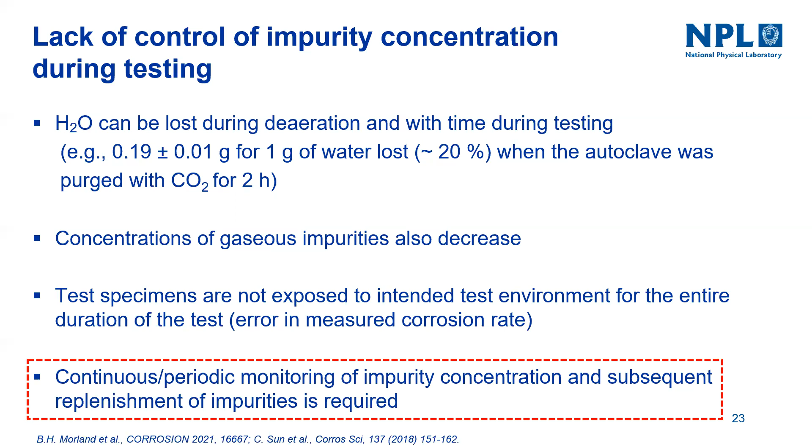The other one is the quality of the deaeration process. O2 is abundant in the atmosphere, so deaeration is key. Oxygen forms a less protective film, Fe2O3, rather than FeCO3, and can increase the corrosion rates. Cole et al. calculated that if there is 1,000 ppm of oxygen in the dense phase CO2, very little goes into the condensed water phase - at 1,000 ppm it's less than 10 ppb.

So oxygen should not really play a key role, but several studies have indicated that oxygen takes part in electrochemical reactions and significantly increases the corrosion rate. So one thing is we need to check the quality of the deaeration process, or understand more if there is any real effect at these concentration limits.

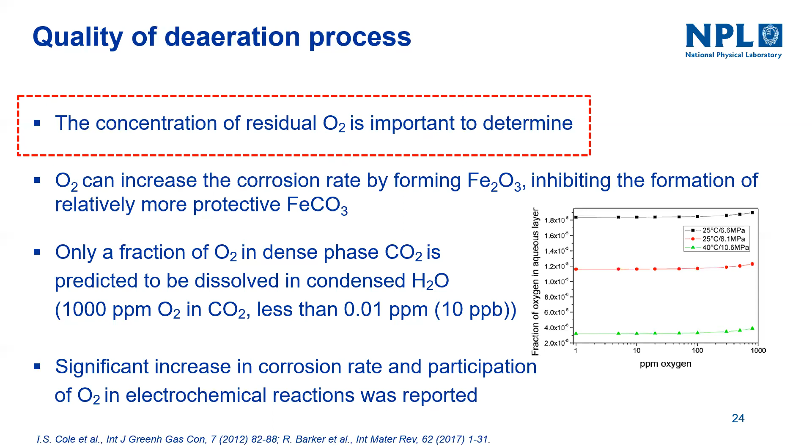The possibility of water splashing on the test specimens was revealed by in situ visualization during testing. Morland et al. custom built an autoclave with a visual window. This is the initial droplet, and while pressurizing the autoclave, you can see splashing of water over the whole autoclave, including onto the test specimens. So corrosion initiates at the start of the test from the splash water rather than from condensed water - in this case the corrosion can be higher.

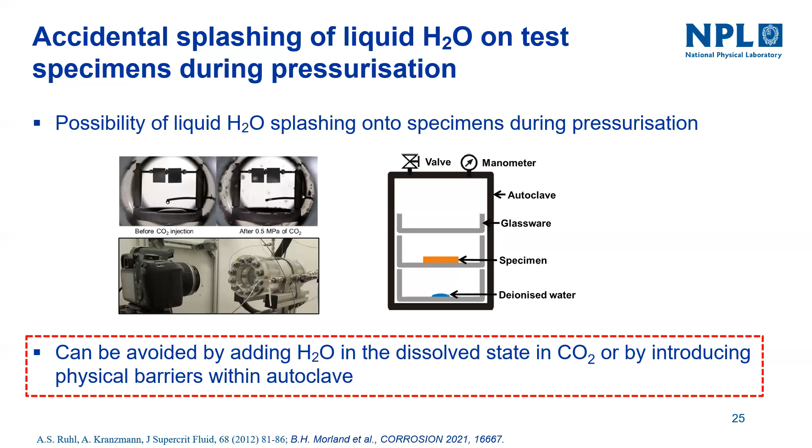Most corrosion studies have been conducted in a closed system where the occurrence of splashing is unknown. This can be avoided by adding water in the dissolved state, or by introducing physical barriers such as this one, but we need to take care if there's any flow we want to introduce to the specimens.

This is the condensation of the water. Normally what we do is at the end of the testing, we depressurize the autoclave. We have seen the influence of temperature and pressure on solubility of water - once you start to depressurize, the solubility of water decreases, and that leads to condensation.

These studies have observed a corrosion rate of about 0.03 mm per year, although the specimen did not suffer any corrosion during the actual exposure. So if you take more time to open the autoclave and clean it, the contribution of corrosion from condensation of water during depressurization will be more. This can be avoided by purging the autoclave with CO2 prior to depressurization.

So another factor is the test duration. What does test duration mean? It's the time during which test specimens are exposed to the intended test environment. But what is commonly considered is the one where temperature and pressure of dense phase CO2 are stabilized. Normally, once we add liquid water, for it to go into the soluble state takes 7 to 24 hours, depending on different experimental conditions. So technically, the test specimens are not often exposed to the intended test environment for the whole duration of the testing.

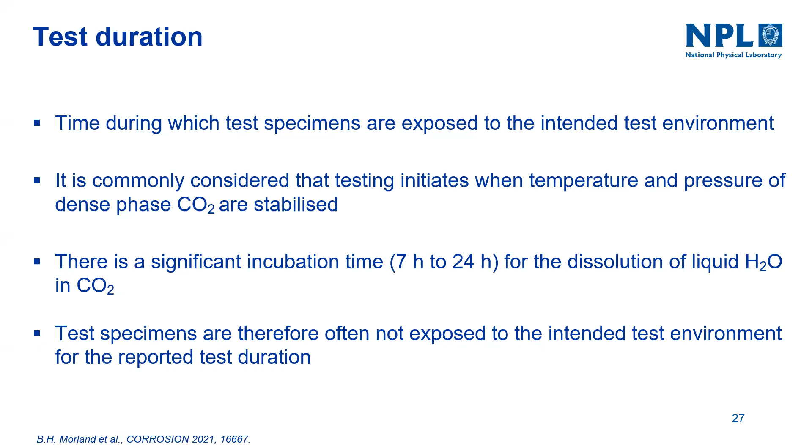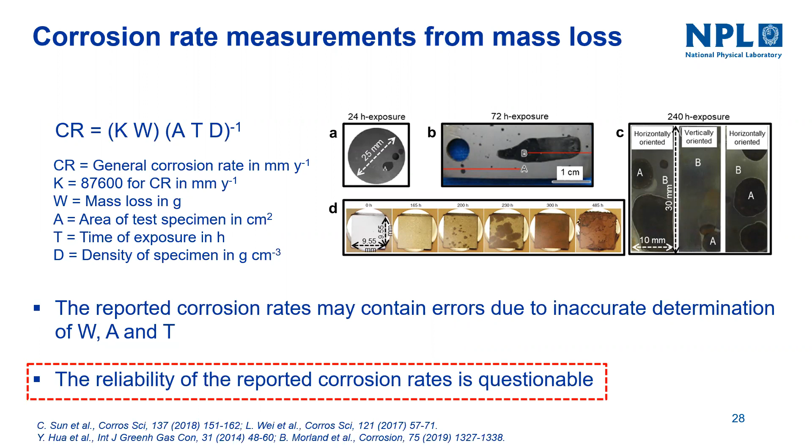So just to give a clear view, this is general corrosion rate measurement. It has a contribution from the mass loss, the area of test specimens, and the time of test duration. From the previous understanding, we have mass loss from water splashing and accidental condensation of water on the surface during depressurization. Also, the time is not accurate, it's more than the actual time, and the area of corrosion can be significantly lower or significantly higher in some cases, but normally the whole area of the test specimens is taken into consideration. So the reliability of the reported corrosion rates is questionable.

So what we have done is compare the corrosion rates containing only water as an impurity, because several studies have used different concentrations of impurities. It is very complex to compare one study with another, considering several factors influencing corrosion. Even having just water as an impurity is very complex, with different exposure conditions and flow rates.

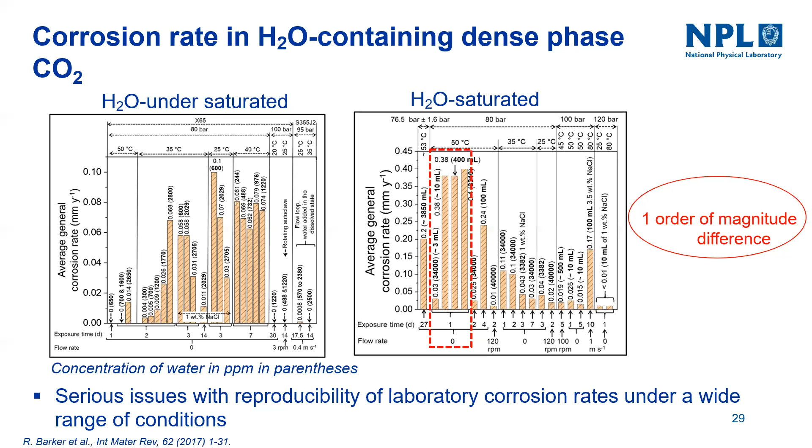With H2O as well, it's very complex to compare because of different varying parameters, but there is one condition where everything is the same - 50 degrees centigrade, pressures, flow rates, and time - yet there's a significant difference of one order of magnitude from one study to another. This is data from the last decade, so it is highly concerning - a serious issue of reproducibility. It's very hard to compare one laboratory test to another, and we can't deduce reasonable conclusions based on flow rates, temperatures, or pressure. It's really concerning, and similarly for localized corrosion rates, typically one order of magnitude has been reported.

Second, normally people use the word pitting for these cases in low carbon steels. This should not be confused with pitting in corrosion resistant alloys. What it exactly means is localized corrosion with much deeper attack compared to other regions. So it's better to call it localized corrosion regions.

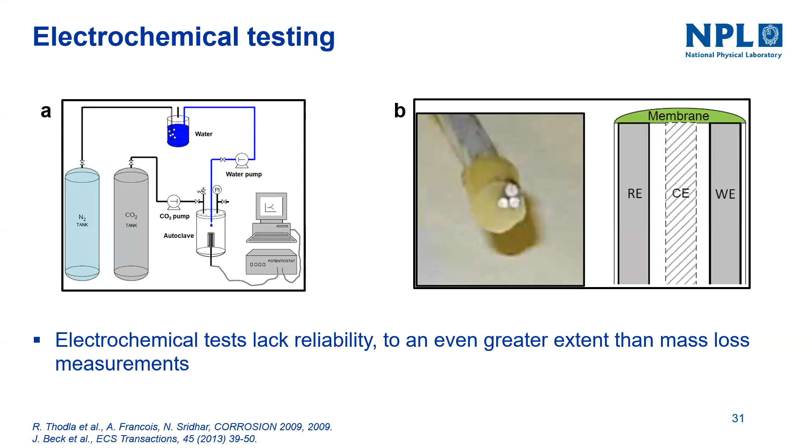Now discussing electrochemical measurements. These normally help understand corrosion mechanisms and determine instantaneous corrosion rates. But they also have reliability issues, to a greater extent than mass loss. The issue is that the condensed phase is very low in volume, so it can't normally wet conventional size electrodes. So people have miniaturized these electrodes so that condensation on them can provide electrochemical understanding. But still, we can't polarize the electrodes to very high potentials because of the low volume.